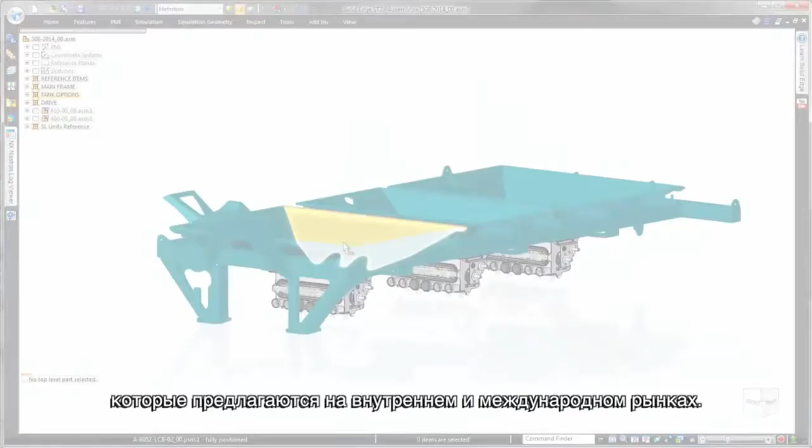Pibotech is a South African manufacturer of agricultural machinery and is the sole developer and manufacturer of Equalizer agricultural implements. For more than a decade, they have successfully used Solid Edge to produce mechanized planters on offer to domestic and international markets. We'll see some of the straight brake sheet metal capabilities used to create a safety guard that encloses the chain and gears of a planter's meter box assembly.

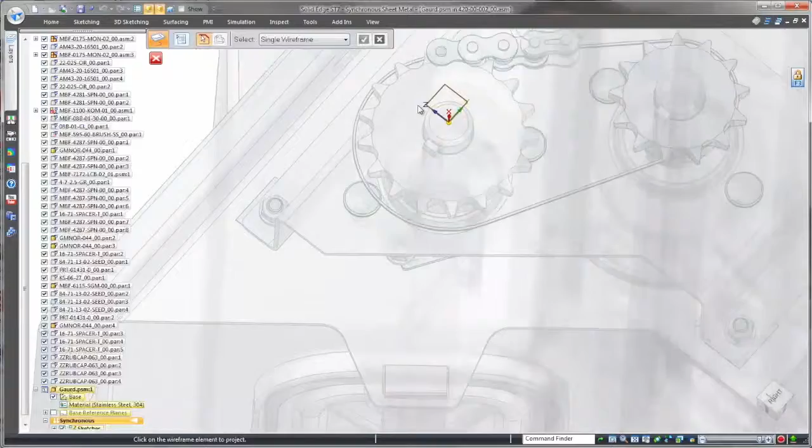Solid Edge excels with large product structures, and designers can work efficiently in the context of thousands of surrounding components by quickly focusing on a subset of the overall product. Here, watch as construction of the safety guard begins as a sketch, referencing geometry from the adjacent product structure.

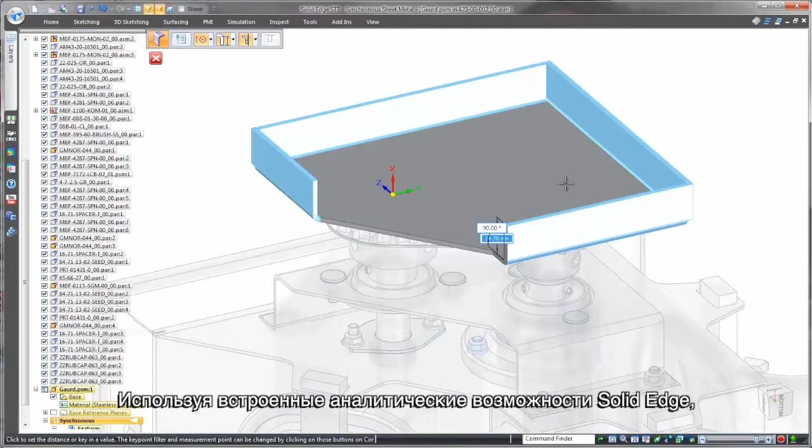Once we have a region encompassed by these curves, we select it to create a sheet metal tab. Solid Edge automatically assumes that a tab is the basis for sheet metal work, so no specific command is needed. Continuing to lean on the inherent intelligence within Solid Edge, we'll create 4 flanges by selecting and simultaneously dragging appropriate thickness faces, using a corner point from another component to define the flange length.

Again, work directly with geometry. That's creation in Solid Edge. We'll quickly define a jog to prevent interference. Solid Edge commands are intuitive and fast.

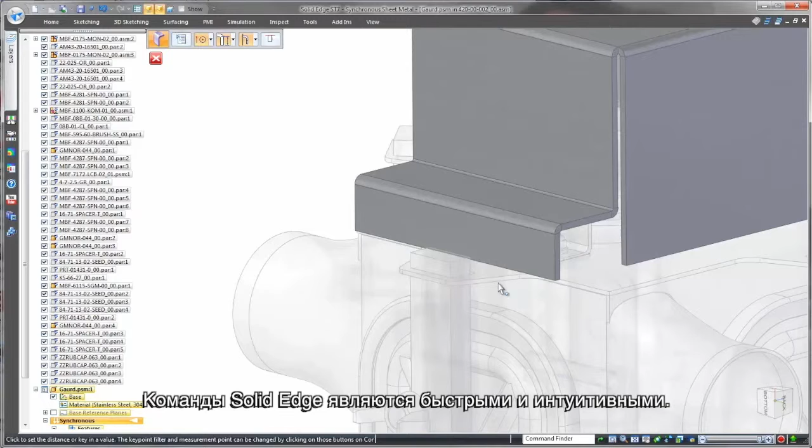Partial flanges can be defined and customized via the innovative heads-up command interface. Design intent is incorporated by relating faces. When flange sides need to match those from adjacent components, the handy radial menu initiates a simple sequence of picks to get the job done.

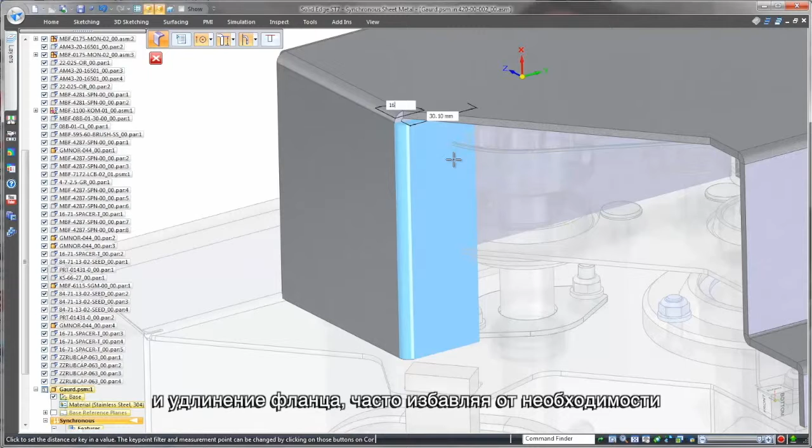Solid Edge makes easy work of reorienting and extending flanges, often removing the need to measure angles and distances. For visual face modification, the handy steering wheel is always available. And when driving dimensions are necessary, it's easy to place them on the 3D geometry and change them as needed.

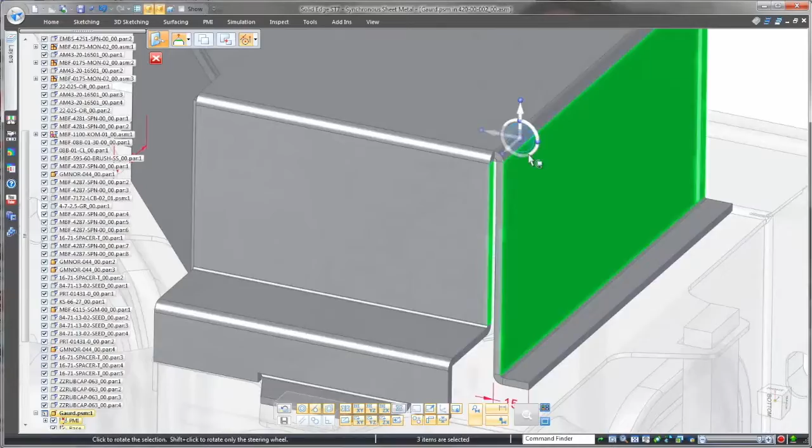Using surrounding geometry, creating sheet metal features like this dimple is fast and accurate.

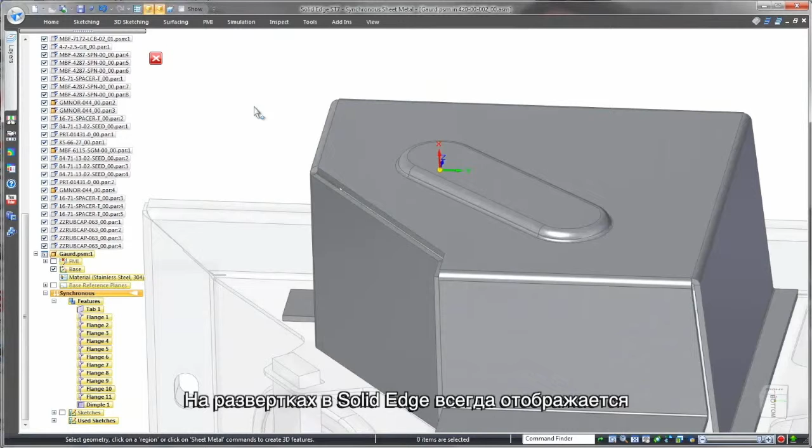For manufacturing purposes, Solid Edge flat patterns always show the most efficient cut sheet size, and that's great for nesting.

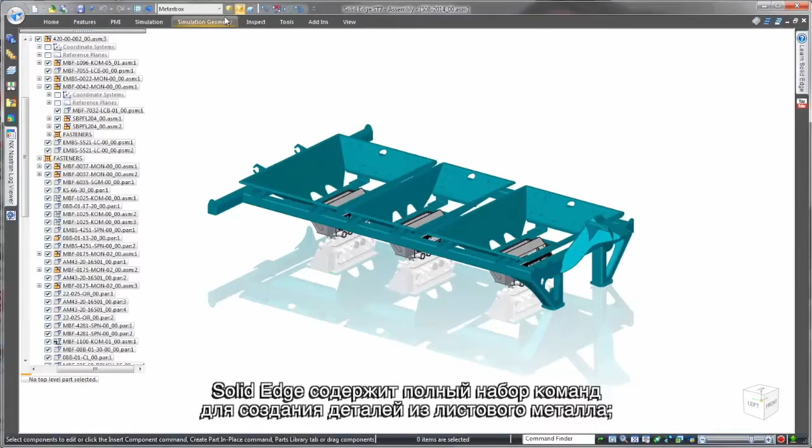The Solid Edge drafting tools facilitate creation of dimensioned drawing views fully associative to the model. Note that as we close the drawing and return to the assembly, the guard is placed in all 3 locations in the Meterbox. Solid Edge contains a full set of sheet metal construction commands.

Watch as a rectangular to circular plenum in the blower fan assembly is lofted between existing parts.

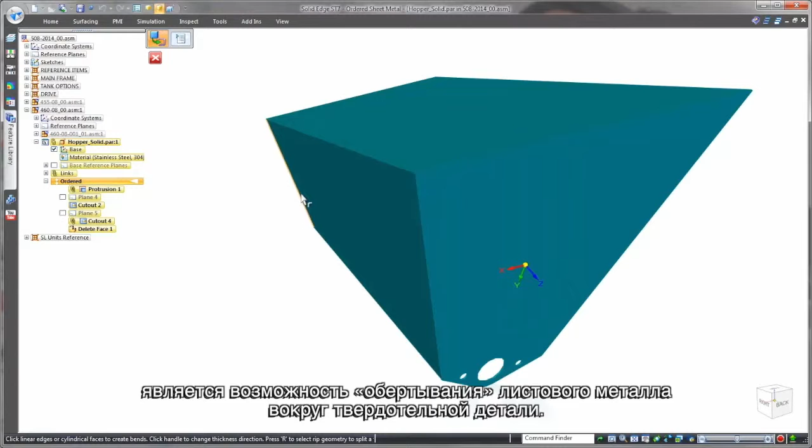Another strength of Solid Edge is the ability to wrap sheet metal around a solid part. This conversion of solid block into sheet metal is especially useful for complex shapes, as solid modeling is often faster and easier. Now that's productive.

To integrate with your CNC machinery, Solid Edge flat patterns can be exported into a DXF format with intelligent layer control.

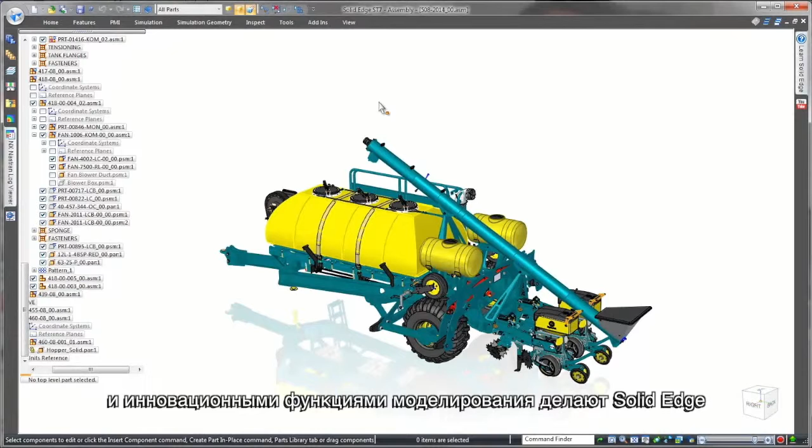Direct interaction with surrounding geometry, coupled with industry-leading design tools and innovative modeling capabilities, makes Solid Edge the choice for companies looking for an edge over the competition. Solid Edge. Design better.